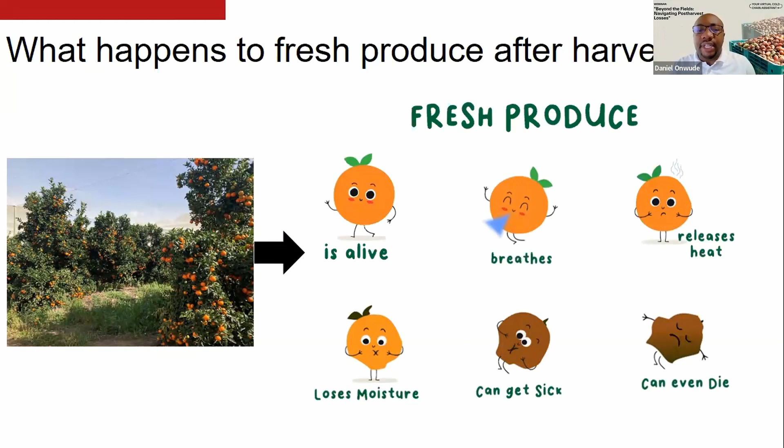But let's see really what happens to these fresh produce once they're harvested from the farm. There are different steps and challenges they go through, which also depends on the value chain and the end product. The typical supply chain of fresh fruits and vegetables could be domestic or export supply chain.

Consider oranges, for example. If they are to be turned into juice or other processed foods, and they are meant to be eaten domestically or locally, they go from the farm to a place where they are sorted and packed. After that, they might be cooled down and stored before they are taken to the factory, where they are turned into juice, dry fruits, and frozen fruits, and so on. Once they are processed, they are sent to the retail outlet, like supermarket or market, for us to buy.

But for fruits and vegetables that we eat fresh in the same locality, they go through similar steps. They are sorted, cleaned, and treated to be of good quality. Then they are kept in cold storage before they are sent to stores. The ones that are not good enough to be sold might go to the factory for more processing or be used as natural fertilizers back on the farm.

Now, for export supply chain, for the fresh produce, after cold storage, they are often shipped in specialized containers with cool temperatures, just like the big fridge that we have in our homes, to stay fresh during the journey to different regions.

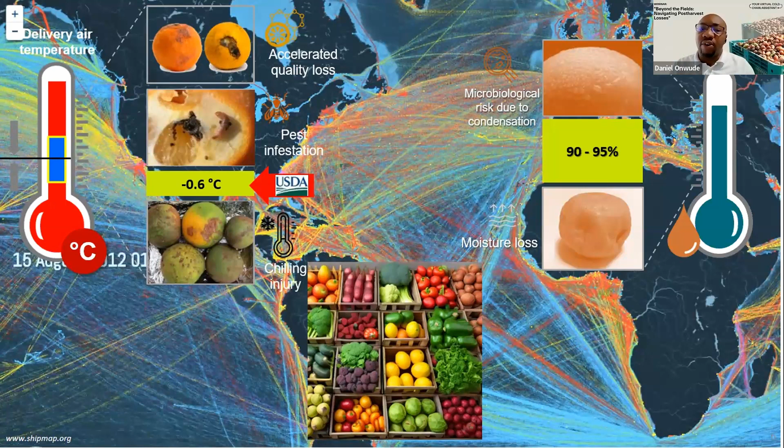Apart from these drivers, we also have the issue of multi-commodity. We have issues waiting at the port or handling issues. All these lead to huge amounts of food losses and waste across the post-harvest supply chain.

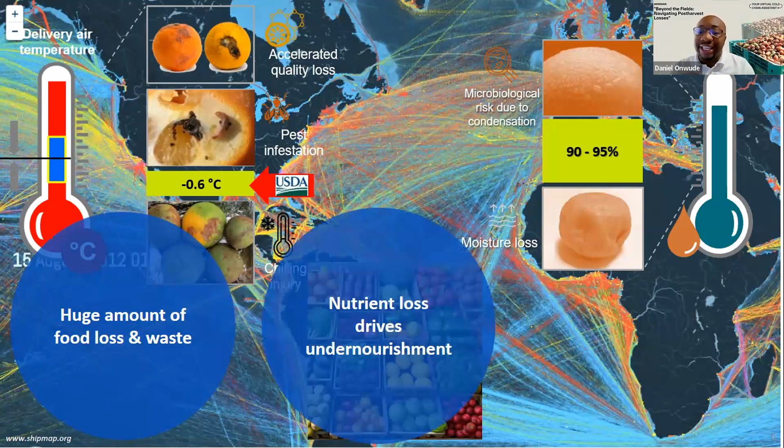Now, this waste, in addition to the degradation of some nutrients over time, also means that we lose important nutrients in the food that gets to us as consumers, which can make us, of course, less healthy. All these losses also translate to loss in water, land, labor, and even capital.

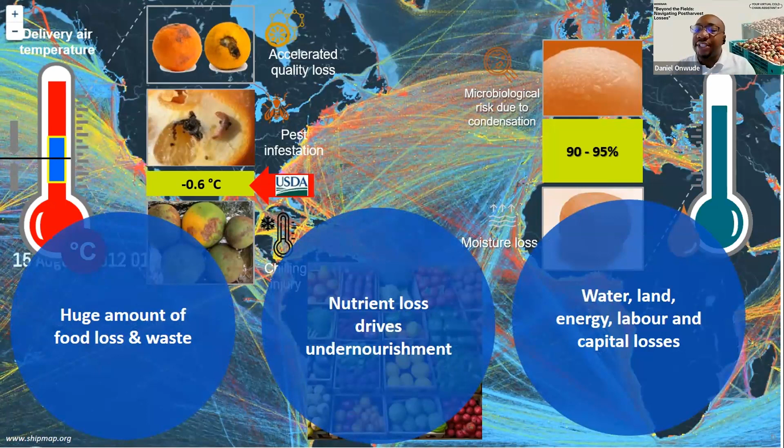Now, the question is, how do we solve this complex issue? I would say to solve this key problem, we need to better preserve nutritious food in this complex supply chain, and make sure that more people have access to this food.

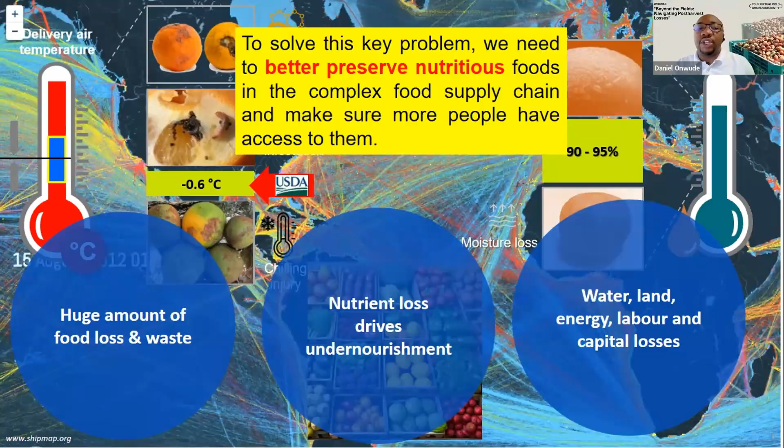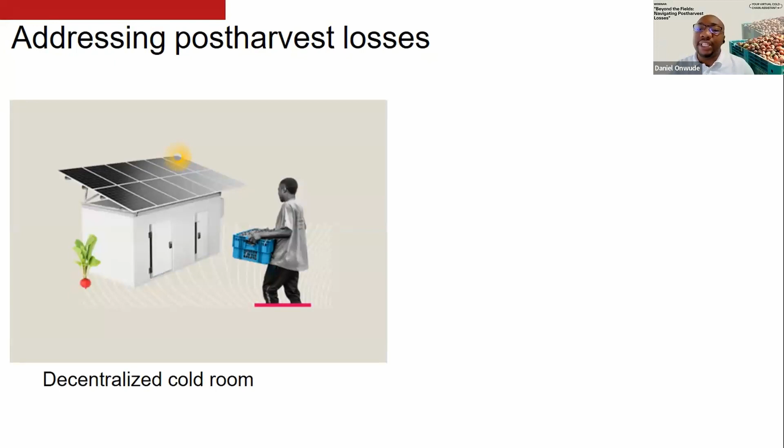Now, to address this, there are several solutions, several methods that we could use. But focusing on low and middle income countries, a promising approach to tackle post-harvest losses is the use of decentralized cold rooms near our farms and markets. Another effective strategy is utilizing passive cooling systems for storing fruits and vegetables after harvest. However, these solutions remain underutilized, particularly in these low and middle income countries.

So to gain a deeper insight into the reasons behind this underutilization and explore potential mitigation strategies, we will turn our attention to our esteemed panel of experts. And we'll, of course, take up questions and try to answer them at the end of the panel discussion.

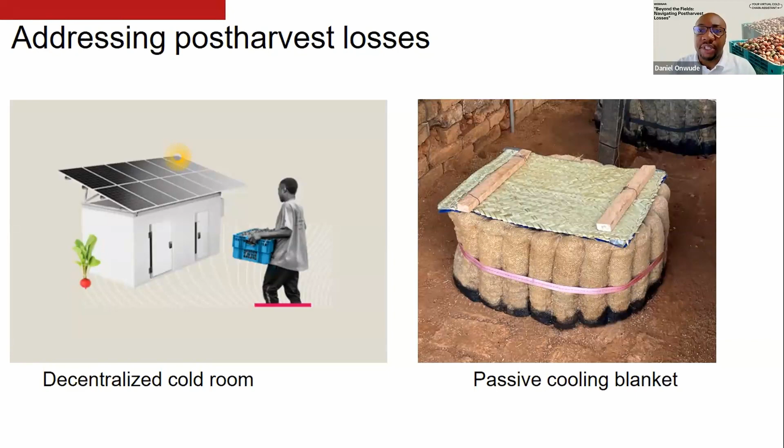Okay, so I will start with you, Sonia, if you don't mind. So I have a question for you. You could put up your screen once I ask the question if you like. So my question to you is, what sustainability and technical considerations should cooling providers prioritize when designing post-harvest storage cold rooms? And the second question I have for you is, what is the way forward for using cooling as a tool to fight post-harvest losses?

Thank you, Daniel, for those questions. Yes, do you hear me? Yes. And you see my screen too? Yes. Perfect, then I can start. Yeah, so I made a small presentation trying to answer those questions. No, it doesn't go on. Hold on. Let me try again. Somehow. Do you see the next slide now? No. No? Okay. Yeah. Let me try again. Now? Yes. Okay, perfect. Sorry for the inconvenience. No worries.

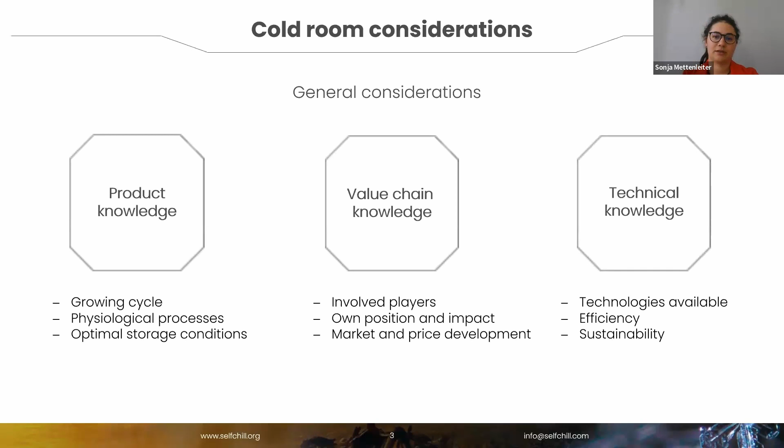So which technologies are available, what's their efficiency, and what's also their sustainability. And at this point, that's the point where I'm going to shine more light on now. So number one is what technologies are even available to cool a space.

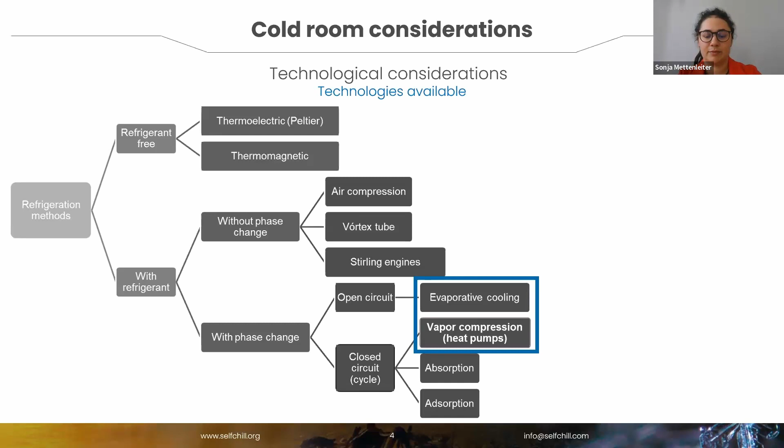So there are refrigeration methods which are refrigerant free. Then there are others with refrigerant, and these are with and without phase change. And within the phase change, there are open circuit and closed circuit. And there, evaporative cooling and vapor compression are the two methods which are mostly used for cold rooms.

Evaporative cooling, also called free cooling, is when you take warm and dry air, and just by adding water to it, you get cold humidified air. That's also mentioned before in the picture with the charcoal cooler, and we're going to have a look at it in one of the next slides.

What is vapor compression? That is mainly known by the people in the AC air conditioning systems that are being used in households and also in industries.

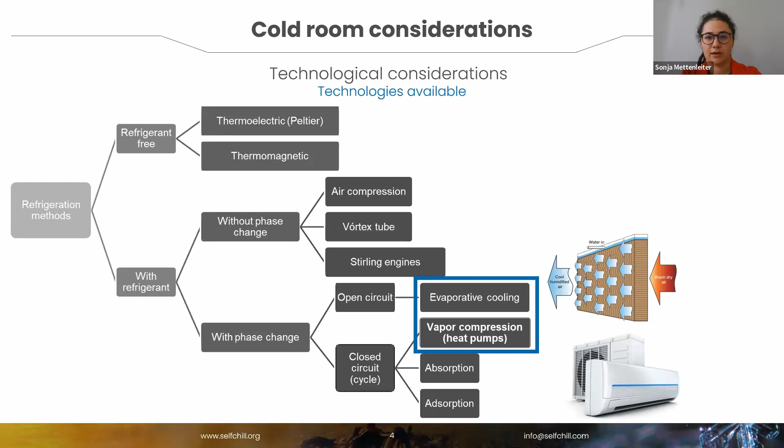To compare the two technologies which are mostly available for cold rooms, that's the charcoal cold room and the vapor compression heat pump, in this case now with a thermal storage and a water-air heat exchanger.

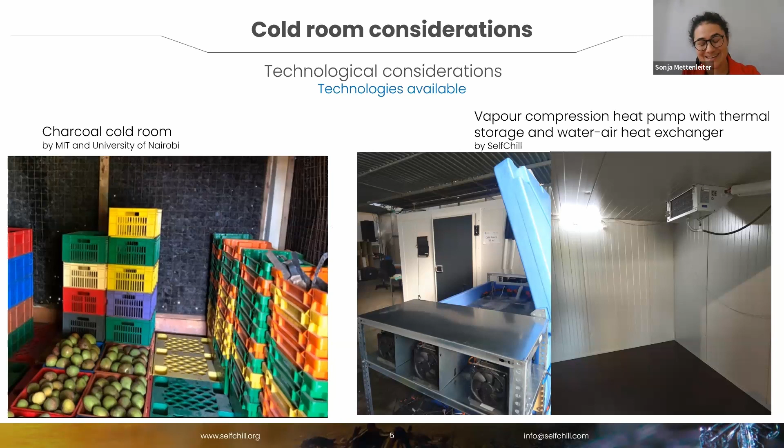The advantages of the charcoal room would be that it can have lower costs because locally available natural materials can be used. It can be done in a DIY option. It is also energy independent because it only requires water. As I said before, it's also called free cooling, because you don't need energy input, you only need water to keep the charcoal wet.

But a negative thing about it is that the temperatures are not stable inside the room. And the higher the relative humidity in your ambient air, the lower is the potential of temperature reduction.

Now when we're having a look at the vapor compression heat pumps, they do have stable and controlled conditions in the room. And you get a temperature range which is much higher than the one which you could get with a charcoal cooler, because you can get down to even freezing temperatures, or if you don't do a chilling room but a freezing room, you can also get below 0.

A thing is that it has energy requirements because it runs on electricity, the vapor compression heat pump, and it is relatively cost intensive compared to a charcoal cold room.

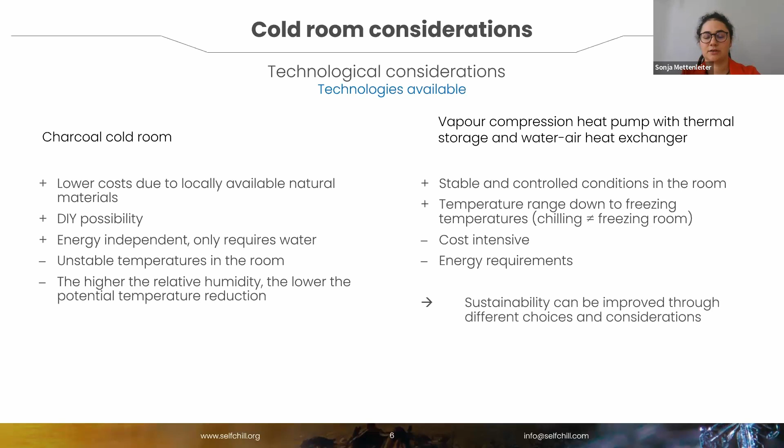But I also wanted to shine a light on the sustainability of it. In the vapor compression heat pump, the sustainability of the overall cold room can be improved through different choices and considerations. One very important one is to use natural refrigerants like R600A or R290. In many countries, using natural refrigerants is already a requirement or will become one in the next years. This is due to the Kigali Amendment to the Montreal Protocol, which was made to reduce the CO2 footprint of the cooling sector.

Another measure could be to use insulation material from natural resources. This is still a bit at the starting point, but has a lot of potential too. And also to do local production to decrease the transport and strengthen the local economy to become more overall sustainable, as well as to upcycle or reuse materials to become part of the circular economy and be more sustainable.

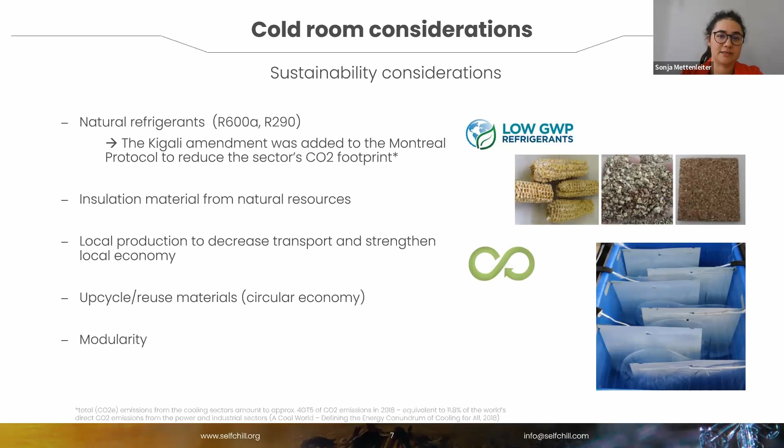And of course, modularity, because there is no one size fits all. So sometimes a system, if it's just one size, then sometimes it can be oversized for one application and undersized for another one. And this is also not sustainable.

Now, what would be the way forward? The important steps are to increase the efficiency, increase the sustainability, close the cold chain, and education.

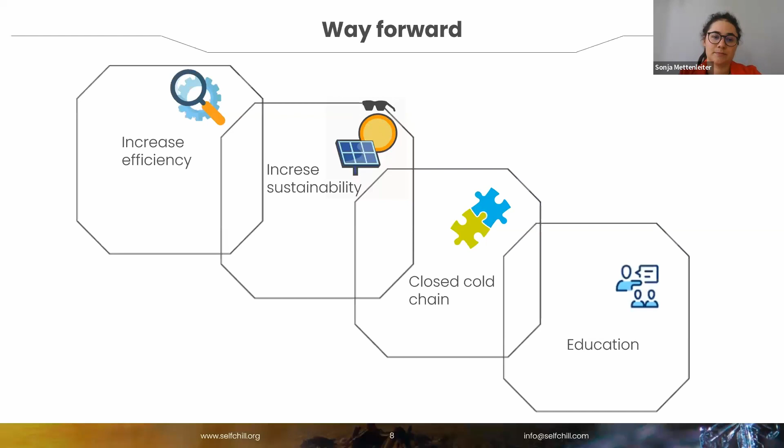Now, to increase the efficiency, the heat pumps must be developed for the corresponding environments, because we're talking mostly about the tropical countries. So we are talking about high ambient temperatures. Therefore, the heat pumps should be developed to suit especially those climates, and thereby also increase their COP.

And then also, most of the time, if we talk about the vapor compression heat pump cold room, then there needs to be energy available, and in every case the best and most reliable and cost-efficient energy mix should be found.

And then thermal storage can be added to increase the autonomy time and to save, if we're talking about a solar-powered cold room, to save batteries.

The insulation material, which I mentioned in my previous slide, is also an important way to increase efficiency, because of the thickness and the material being used. With adequate material with good thermal properties, thermal losses can be reduced drastically.

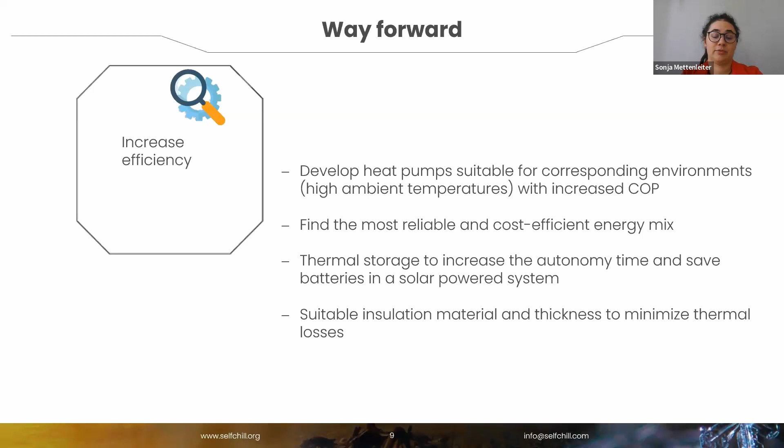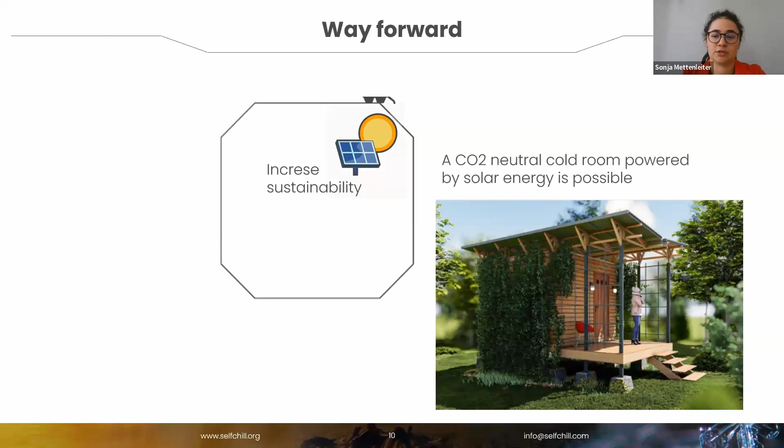In terms of sustainability, a CO2 neutral cold room powered by solar energy is possible. At SelfChill, we are currently working on using as much natural material as possible, as locally manufactured as possible, and with solar power as the power source.

Another important stepping stone is a closed cold chain, because an uninterrupted cold chain from field to fork is important. Cooling can never restore product quality that has already been lost due to lack of cooling; it can only maintain the quality. Therefore, variation in types and sizes of systems that suit the implementation point in the value chain is crucial, because the size of the cold room needs to fit where it is along the value chain. At farm level, the size of a cold room will definitely be different than at port level or industry level.

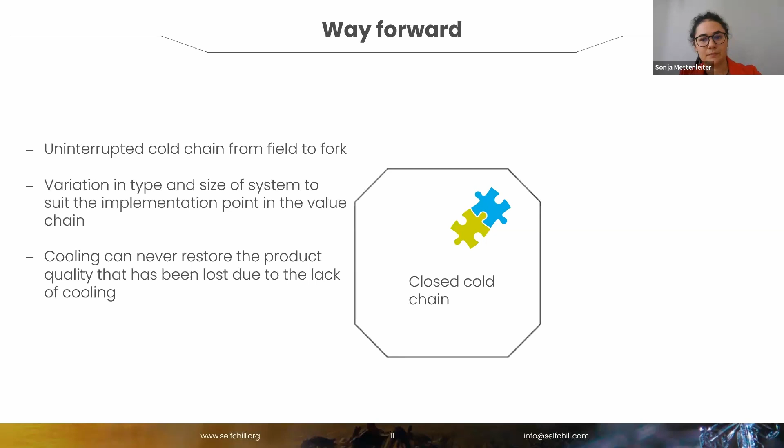Another very important point is education. There must be education, just like this webinar, about best practices on product handling and quality conservation, but also about cooling requirements, the ability to evaluate technical design considerations, see market linkages, and have financial literacy about the costs and return on investment of a cold room.

So that's it from my side. Thanks very much for this opportunity to talk here at the webinar. And if you'd like to know more, here are my contact details.

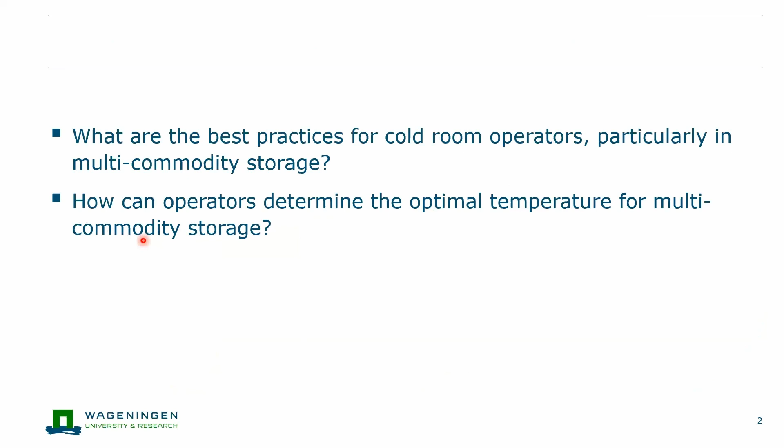Thank you, Daniel, those questions are very good questions. I put them in my PowerPoint. Yeah, now it's working. So what are the best practices for cold room operators, and at what temperature do we have to store? It goes hand in hand, I think.

The first question starts with temperature management. It depends on the situation, but if the cold storage starts at the farm or near the farm, we have to take into account that best practices start in the field. So we want to minimize the temperature increase.

So tip number one is to avoid field heat buildup. Put the fruit under a shed, in the shadow, or leave it as short as possible in the field. So yes, best practices for cold rooms start in the field.

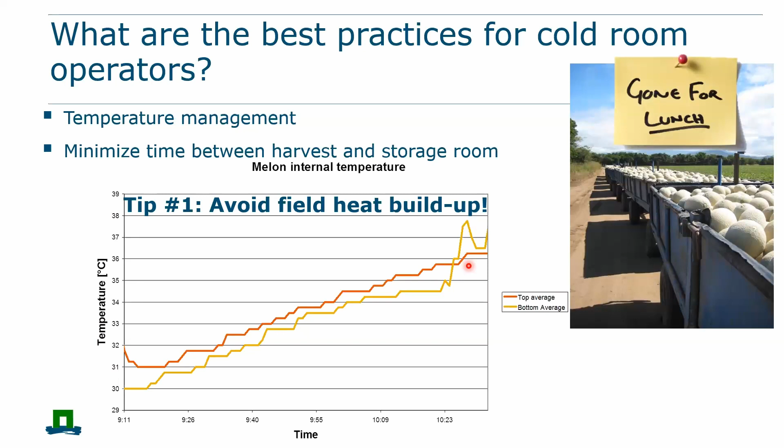But if we're in a situation where we do not have control over what's happening in the field, then I want to sensitize about the importance of pre-cooling, because it's not only about cooling, but also about how to pre-cool.

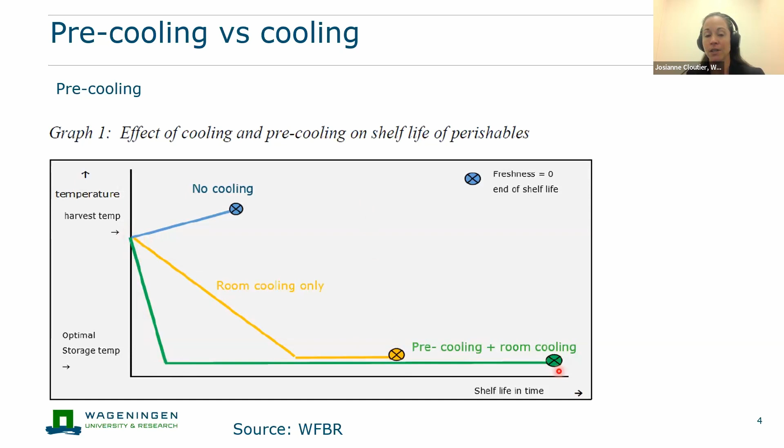What is pre-cooling? Pre-cooling is decreasing the temperature of the product quite rapidly after arrival at the cold storage facilities to extend the shelf life. It also allows separation of what's already been cooled, in a separate room, from what still needs to be cooled.

Because if we have products in one room at the target storage temperature, let's say 2 degrees, and we bring something in which is at 25 or 30 degrees, it will warm up the room, and then we have to take all that heat again. So the product temperature will vary, and we want to avoid that because the temperature variation in the storage will contribute to a shorter storage possibility and also shelf life.

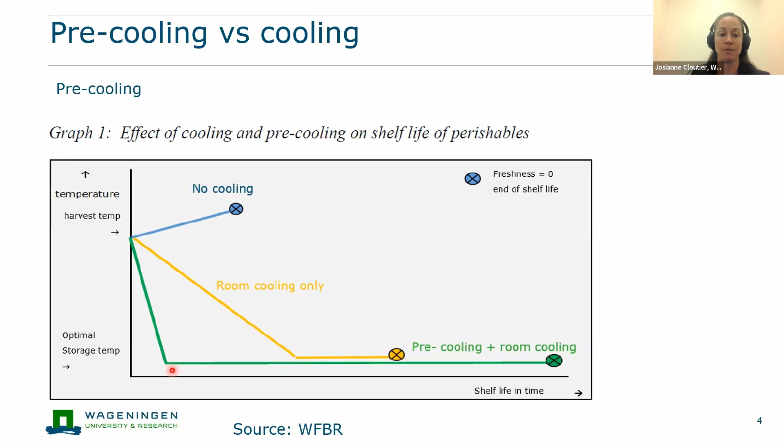So tip number 2, use pre-cooling to extend the shelf life and reduce the cooling time and energy. But what is pre-cooling? So I'll show you a few examples.

It can be to simply place the product in a cold room, which is only dedicated for the pre-cooling, and once it reaches target temperature, then it's moved to a storage cold room.

We can also use plastic tarps to direct the air circulation to improve the circularity of air to cool down the product more rapidly. You also have forced air cooling, which is a common method. It's then you cover the product with plastic and you put a fan to really force air to go through it. Of course, you have to be careful not to overdo it, because then you can also damage the product.

In cases of more specific pre-cooling, we can use vacuum cooling, which works with pressure to remove the heat. That's done a lot with lettuce, for example. We can use hydro cooling, which is done a lot with carrots or cherries. Or we can use ice, which is often used for broccoli.

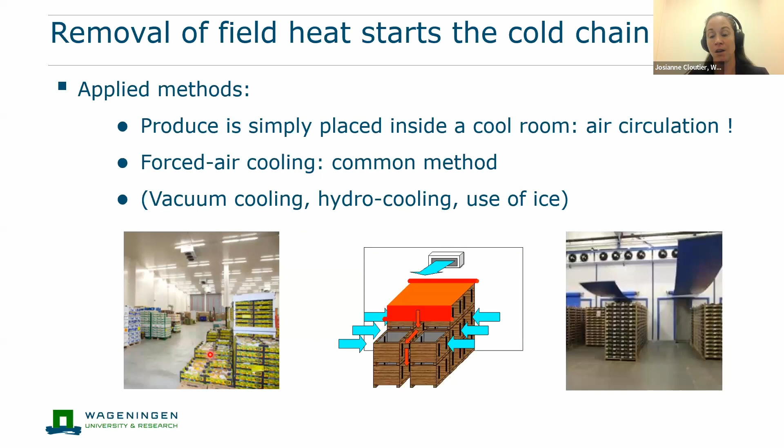In the first picture here, we see the result of multi-product storage. We see different boxes of different products that, once they're at the target temperature, can be put in the same room. I will come back to it.

A little bit more about the airflow, continuing my talk on optimizing cooling for the best practices, is that we want to prevent false airflow. This is why we put those plastic here, to ensure that the cold air goes around the product and comes back. These must be looked at individually.

Of course, there are big rules of thumb, but it has to be designed for every individual cold storage. It will depend on the ventilation, the refrigeration capacity, the product itself, and the type of bins used. So all those factors will affect how to prevent the false airflow.

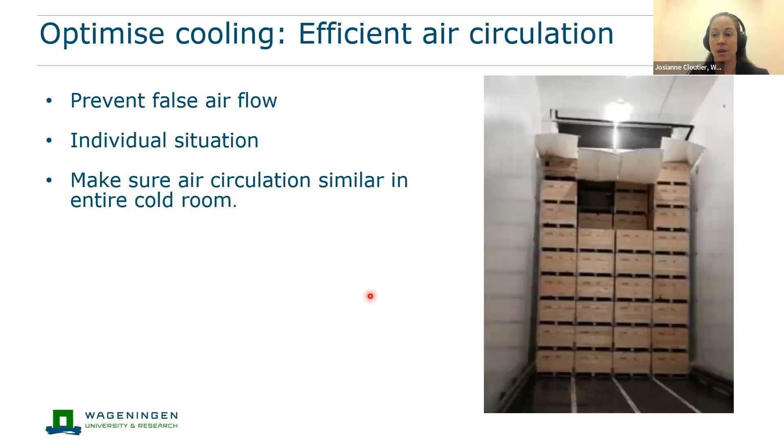And lastly, you have to make sure that the air circulation is similar in the entire cold room. We want to minimize the hottest spot and the coldest spot to have a uniform condition for the products.

Another thing we can think of while doing the best practices in a cold room is that we want to have the right refrigeration capacity. Reducing energy consumption can be achieved by having the right capacity.

And then it depends on what type of pre-cooling you have, what is the field heat that you have to remove, and so forth, and the temperature at which the product needs to be stored, and how long it needs to be stored — whether we're talking about long storage or short storage. I will come back to it. Then you need a certain refrigeration capacity.

And you can compare it to a car. If you want to save on your car and you buy a smaller motor, because the smaller motor will consume less, but you are in a very hilly environment, then you will lack power for your car to climb those hills, and therefore you will end up using more energy than if you would have a more powerful motor.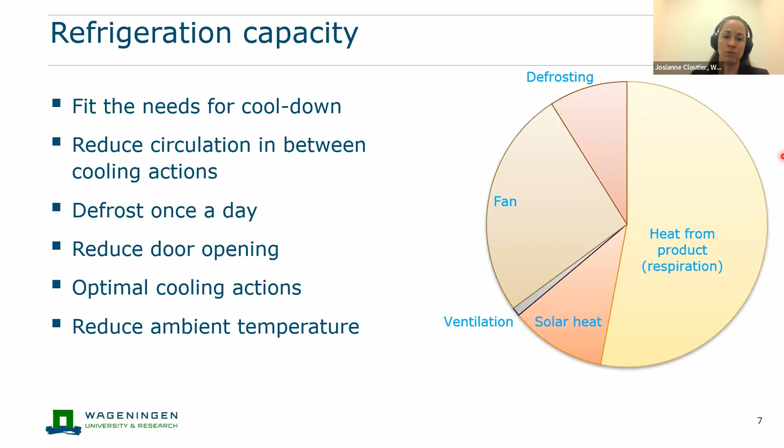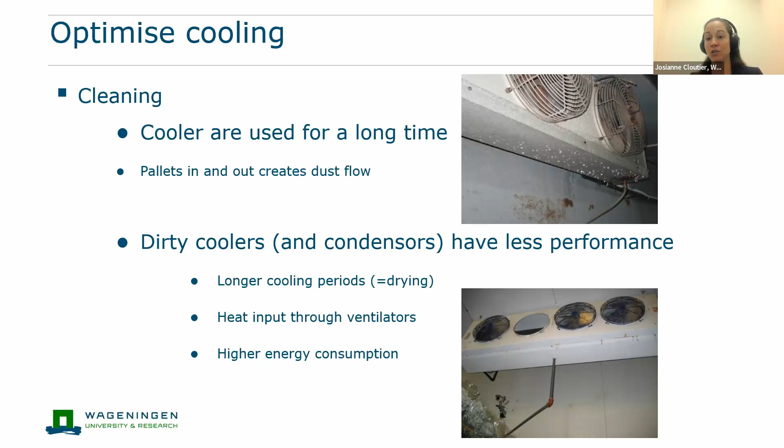Then to optimize the cooling, you have the running of the refrigeration, but also the maintenance. You want to keep it clean and intact. Don't forget that pallets and bins can also create dust, and that dust will end up in your refrigeration system. So you want to keep it clean, to keep it as efficient as possible. It seems very logical, but it is unfortunately often forgotten. So keep it clean on a regular basis.

Now that brings me to the second question, which was, how can we operate a cold room at the optimal temperature? The question was also for multi-commodity storage. So I will talk about both: only one product per room, and then multi-commodity storage.

To look at the optimal temperature, you have to of course look at the crop. If you store only one produce, you may also look at the variety and the maturity level. You may have to take into account ethylene management. Do you use an ethylene blocker for products that produce a lot of ethylene, which is responsible for ripening? And are you cooling only for pre-market?

That meaning that after 1 or 2 days your produce will be moved to retailer or be sold, or do you want to store it for a long time? You have to define those two goals, because that will also define how you will use your cold storage.

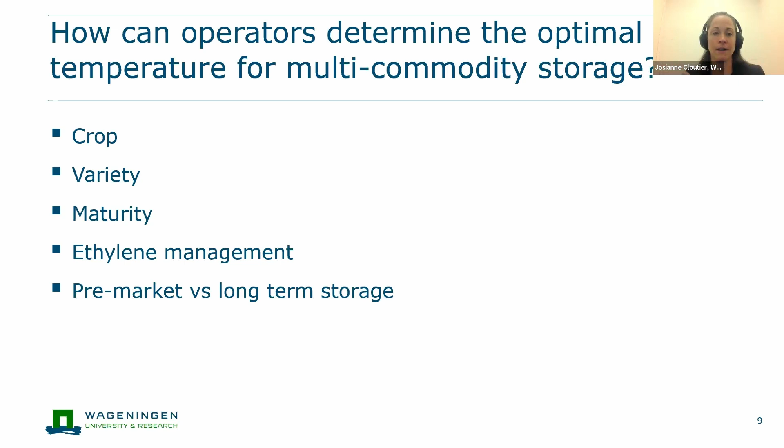In a setting of multi-commodity storage, best case scenario would be to have at least 3 rooms. It's not always possible, but if it is, then you have a room that should be between 0 and 2 degrees for temperate products. Think of apple, pears, broccoli, cabbage.

You also have to have a room between 8 to 10 degrees for subtropical products. Think of citrus, avocado, maybe unripe mango. And then the tropical products, 12 to 14 degrees, for bananas, ripe mango.

And if you do not have the luxury of having 3 rooms at 3 different temperatures, then you have to compromise. Maybe 4 degrees could be the best scenario you can do, except for bananas—you cannot do that. But for the other products, the subtropical products, they may survive at 4 degrees as long as they are there for a very short period of time, meaning they will not actually reach that 4 degrees.

Meaning that they are coming from somewhere else, stored at 8 to 10 degrees, and you bring them to that cold room for a short period of time at 4 degrees. So it will take some time for them to reach 4 degrees, and then you might keep the quality without any chilling injury. Chilling injury is when the fruit is exposed to too cold a temperature and the quality of the product degrades.

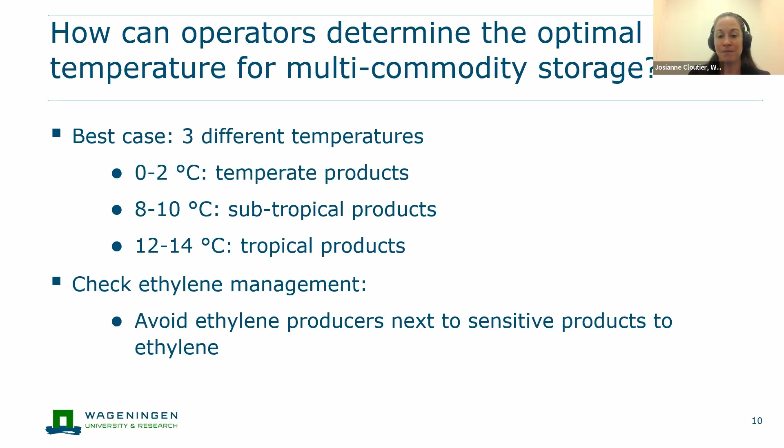And maybe something more practical: garlic and mushrooms don't go well together, but it's more because your mushroom will taste like garlic. Although when you cook them, mushroom and garlic go well together, you don't want to sell them this way. So yeah, those are practical tips.

If you are interested, we have an application for long storage of cold storage of apples and pears that we developed. We give advice via this application that will give you the temperature your cold storage needs to reach according to the crop, the variety, when it was harvested, and whether you use the ethylene blocker—in this case, the 1-MCP.

What CO2 level and oxygen level do you have to bring your cold room to? And for apples and pears, the moisture loss is managed, and you want to lose a little bit of water for apples per month, and for pears, you want to limit that.

So we give advice. If you are interested, you can also contact me. So in conclusion, I wanted to wrap up: avoid field heat buildup, use pre-cooling, use the refrigeration capacity that fits your need. Make sure you optimize cooling and your cooling actions, use good maintenance, and determine the optimal temperature for what you're storing.

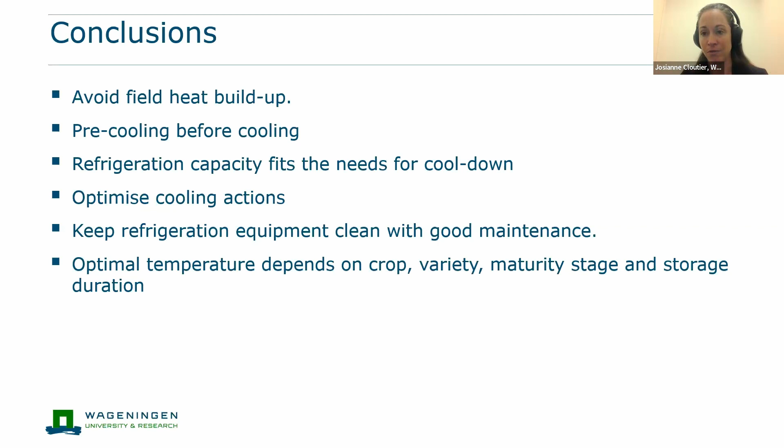Then you have to look at which crop you're storing, how long, and make either compromises or make use of several rooms. Feel free to contact me. We also have a website, freshknowledge.eu, where you can find a lot of free information. And that closes what I wanted to explain.

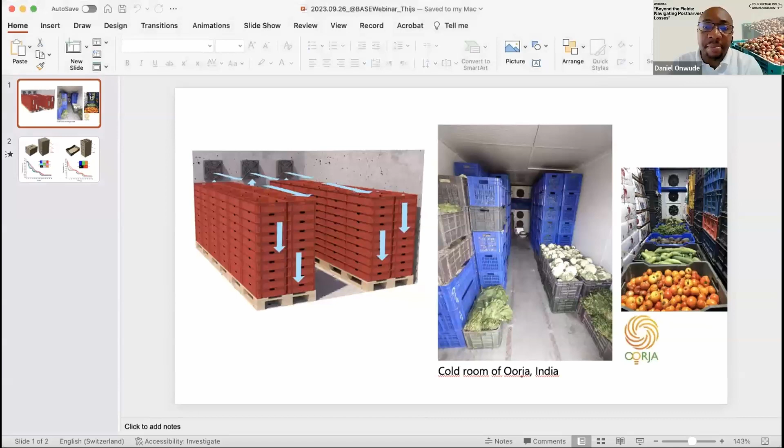So I have a couple of questions for you. I'm sure Josianne and Sonia have touched a bit on these questions, but maybe it'd be nice to also hear from you. What factors influence the positioning of crates within a cold room? And how can we envision a crate arrangement in a multi-commodity room to ensure that crops tolerant of warmer temperatures are placed in the appropriate warmer areas, while those requiring colder temperatures are positioned in cooler spots? The second question: is active cooling always the answer, or are there situations where passive cooling solutions should be explored? It would be nice to also get examples of passive cooling options.

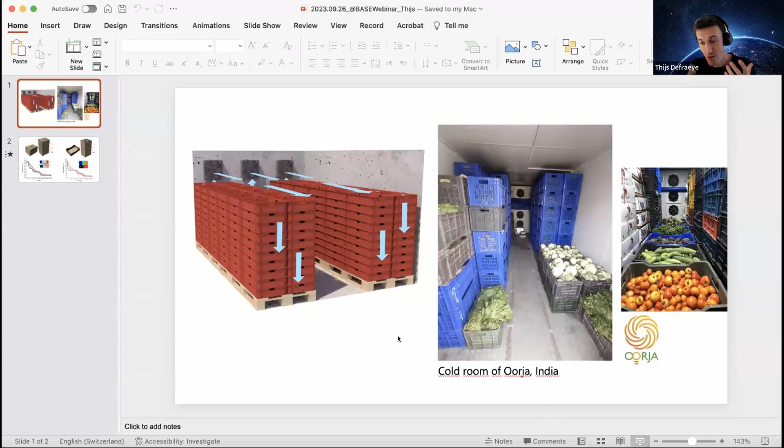Yes, Daniel, thanks a lot for your questions. Happy to be here. So I'll try to give a glimpse of my vision and view on these problems. Josianne and Sonia touched on these aspects already. So the first question would be: where are the warm locations, and where are the cold locations in such a cold storage room? I will focus mainly on the small ones, which smallholder farmers or FPOs can use.

So you see here in the image on the right side, an example of a real cold storage room, and on the left side, another example of a smaller cold storage room. Very important to answer this question is to know where these warm and cold spots are, and this all has to do with airflow.

So you see on the left and on the right these fans appearing. They're normally close to the refrigeration unit, so they blow cold air inside this cold storage room. You have different designs—sometimes the fans are placed in the center, as on the right side, or on the top, as on the left side. So this has a very big impact on where the cold air goes.

What is also very important is how your cold storage room is loaded. If you have it fully loaded, the airflow pattern completely changes, so the worst location for warm temperature changes. When it's half loaded, as you see on the right side, the airflow pattern is a little bit more difficult to predict. So this all plays a very important role.

Another thing is that you can also have airflow bypass, so that the air exits these fans and then finds the shortest route to the outlet. So then actually your cold air does not even touch some of the produce. These are all aspects which play an important role.

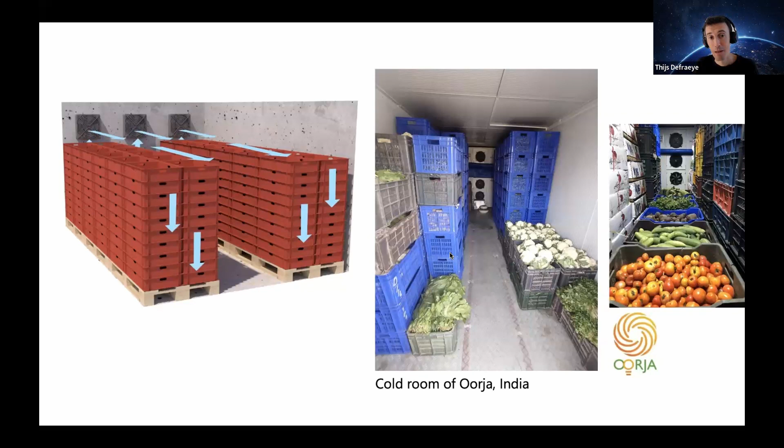And then what you can do to improve this, if you find some locations where the temperature is a little bit warmer than others, then Josiane already mentioned you can use these airflow guiding devices or tarps to direct the airflow a little bit. Often you're very constrained in the space or in the options you have, because these storage rooms are often packed kind of dense, so you don't have too much access. But that's one way to improve it, like they do in industrial pre-coolers.

They also use tarps, for example. And a very important thing is also not to load too much at once, because as Josiane mentioned, the temperature can just go up. This is often difficult to control because you harvest when the time is right, but that's another aspect you could address.

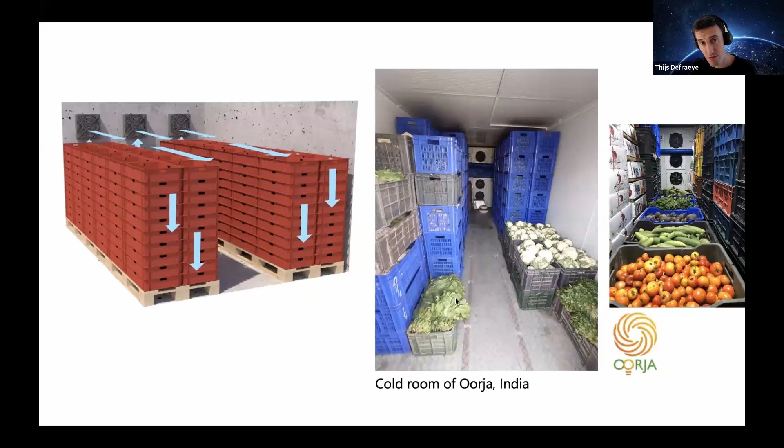Then I touched now on airflow. One very important thing I want to show you, and then we can go to the next slide, is the importance of packaging. So you saw these different plastic crates, that's true. The design of these crates has a very big impact on how fast you can cool down, and this is often an underestimated aspect, I would say.

So here you see, for example, cooling profiles which we did on one single pallet of citrus fruit with a certain type of package. We put a lot of sensors inside, and you see these cooling profiles. You see the temperature going down. It was a step down cooling. Then you see, depending on where the sensors or the fruit are located, the airflow coming in and out gives a completely different cooling behavior depending on where the airflow comes in. So we see that the fruit on the inflow side cools much faster than on the outflow side. It depends where your fruit is located compared to the cold air coming in.

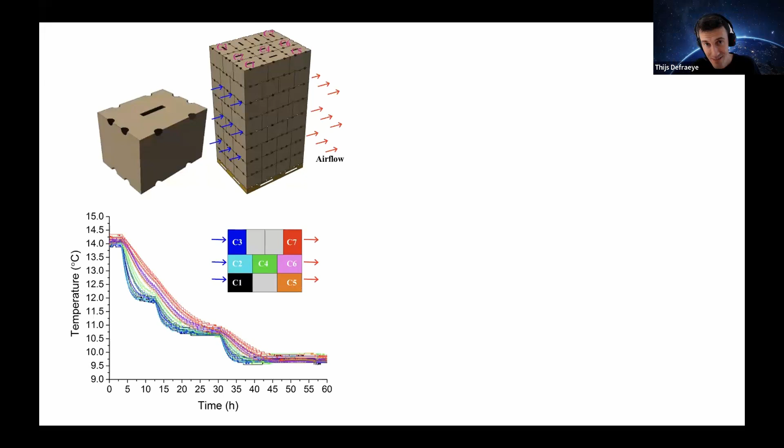If we then change the packaging, and you see this on the next slide, if you use another type of packaging which is more open on the top, the cooling profile completely changes. So depending on which package or crate you use, you can actually cool down your fruit much faster or much slower. That's a very important aspect to consider as well, because these are things you can change. You can make sure that you use a certain type of crate which is a little bit more open and so on. Still, the solution is measuring.

That's actually very important. So that was a little bit my insights for the first question. With respect to the second question, is active cooling always the answer? Or can we maybe use passive cooling?

Sonia touched already on this in a very nice way, showing the different options. I would like to add that active cooling has a lot of advantages. If you need consistency, and if you have rather large volumes which you need to cool down very fast, very perishable products, if you need a constant supply, if you don't want too much risk, then active cooling would still be the best way to go, I would say, although it has a higher environmental impact.

This is all nice, but there is a price tag on this. You have to, as Sonia mentioned, buy the unit, service it, be able to access it, and have enough parts so it runs the entire year. So this is possible for, let's say, FPOs which have a little bit more capacity.

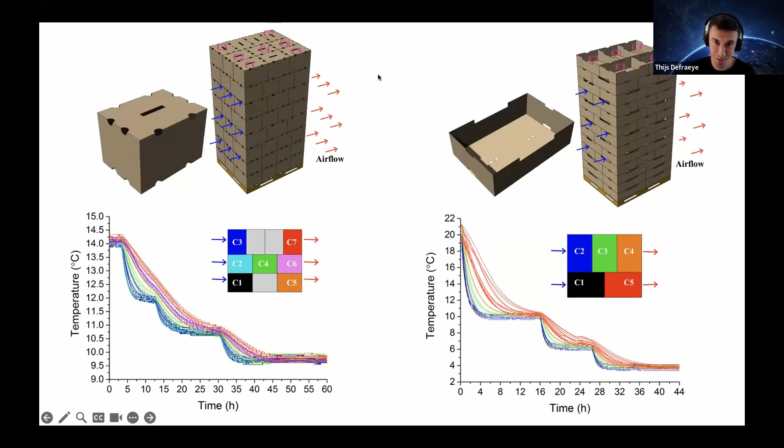Thanks, Thijs. Really nice insights about multi-commodity and also the passive cooling concept. So we have a couple of questions here. Maybe I'll share my screen quickly. I'm not sure if we could take all of them. Thijs has already answered some of the questions - thank you, Thijs, for doing justice to those few. But I would like to ask the panelists some of the questions from the audience.

One maybe to Sonia, to Josiane. One of the questions that came through is: what steps should be followed to minimize condensation on the surface of a commodity when putting commodities into cold storage and when taking them out of cold storage?

Yeah, then that would be to pre-cool the product before packing it, because if we first pack them and then cool them down, depending on humidity level and temperature, that can create condensation in the product. So it depends - I don't know if the question is for packed or unpacked products. Otherwise, it would be to have good airflow to minimize the deposition of water on the products. And when removing the products from the cold room, that is a challenge too - you need enough airflow again to reduce water deposition on the fruits. That's, to my knowledge, what I can suggest to minimize the condensation.